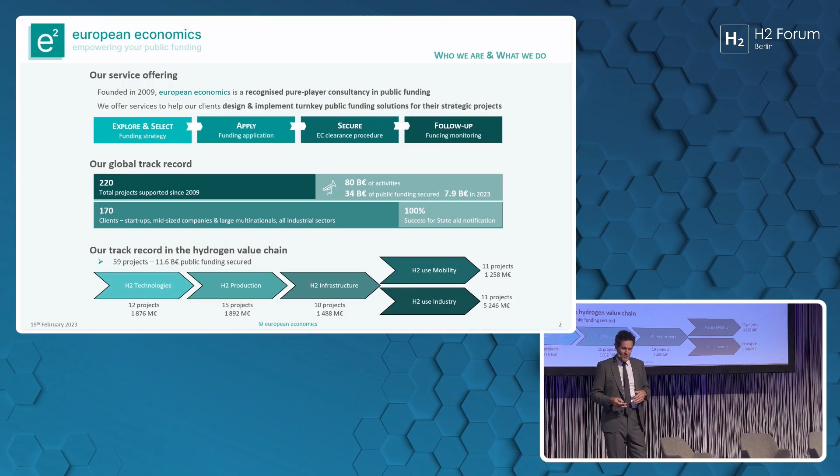As you most probably know, there were 4 IPCEIs on hydrogen that were started. 3 have been validated by the European Commission, 1 is still under assessment. The hope there, starting in 2019 - I remember the first meeting in Brussels in October 2019 - was that the IPCEIs could kickstart the European industry for hydrogen. There were more than 120 projects started in these IPCEIs, and they secured close to 30 billion euros in grants, which presumably could have solved the chicken and egg problem in the European hydrogen industry.

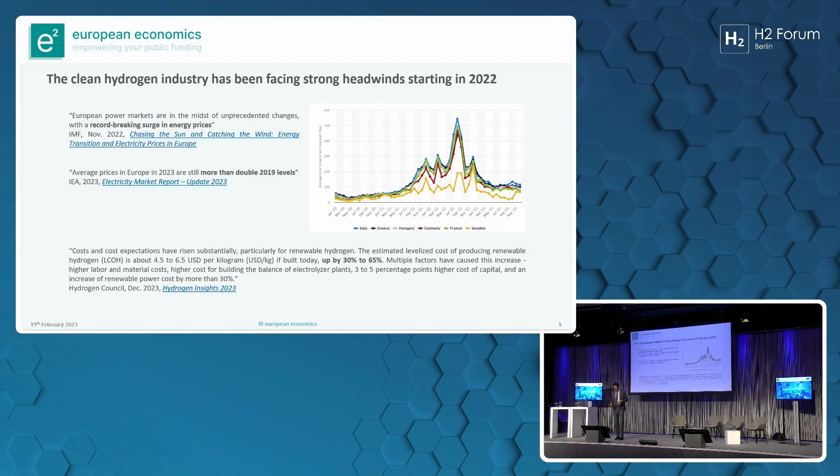So basically the situation that you are facing now as the hydrogen industry is that the IPCEIs, Hy2X, meaning Hy2Tech, Hy2Use, Hy2Infra, Hy2Mobility, will not be able to kickstart the European clean hydrogen market.

Specifically, when we look at the projects on the demand side, well, they were profitable with 100 million euro public funding, with a price of green hydrogen maybe around 4.5 euro per kilo at that time. But now this price cannot be met anymore. So the projects on the demand side are not profitable anymore with the funding that's secured in the IPCEI, and then you have the domino effect again.

No demand means no supply, means no technologies for electrolyzers. This is maybe over-pessimistic, but we basically go back to the initial situation in 2019 with the chicken and egg problem, supply waiting for the demand and vice versa.

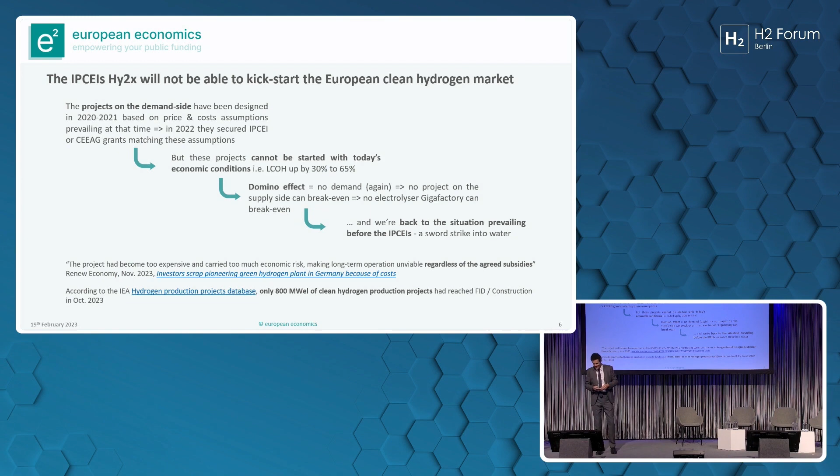So basically, the situation that we are facing now is the same that you faced some years ago. The expansion of the European clean hydrogen industry cannot be unlocked without additional public and free money. Debt doesn't make sense, equity doesn't make sense because the projects are not bankable, okay?

So the only solution is to go back to the member states, the European Commission, to ask for more free money to be able to increase the profitability of these projects. And you have several quotes here on the screen that substantiate my statement here, from projects that say, okay, we hope we could do it, but now we can't do it anymore, given the new economic environment. So the solution is not on us, the solution is on the governments and the European Commission.

So what's the conclusion? We must find a way out, we must act quickly. I think everybody understands that the timeline, there was a kind of hype at that time with the IPCEIs. The promises were very important, very strong, and we realized that it would be a bit more difficult than what we expected at that time. So member states and the European Commission must find a way to secure more free money for clean hydrogen projects.

If we give a look at the European targets for 2030, you know the numbers very well probably. The EU calls for 100 gigawatt of green hydrogen capacity by 2030. From my understanding from the project that we supported, this requires more or less 100 billion euro of public funding for this capacity. For 7 years, that's more or less 14 billion euros per year. We are very far from the target.

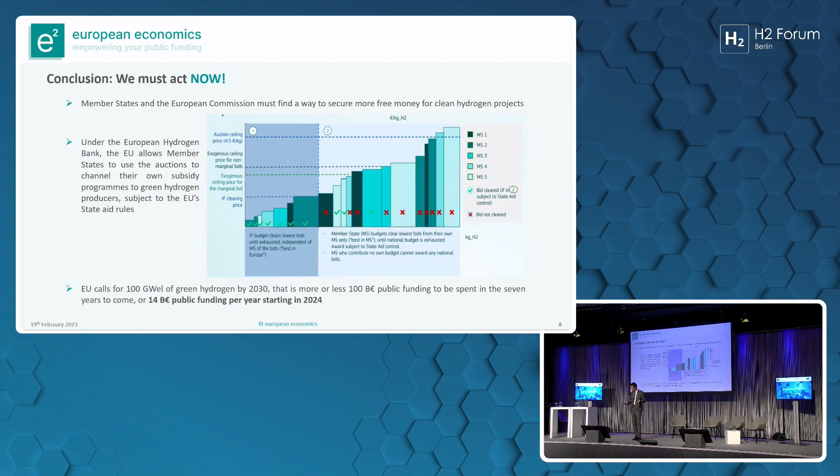It's the big question: why are you there in the world, basically? Maybe you can elaborate on that a bit. Why is there a need, provocatively said, for another costly advisor, when, for example, Hydrogen Europe has a great offering on R&D funding and other supports? So what is the sweet spot, basically, that you are filling with your company?

What was very important in the IPCEI, just to reflect upon support for R&D, the new thing in the IPCEI is that not only R&D could be supported, but also the so-called first industrial deployment of innovative solutions. For example, we supported several projects that would invest into the development of innovative electrolyzers.

The support from the governments under IPCEI rules would not stop at the pilot scale. Companies, conditioned of course on the success of the pilot, could invest into the manufacturing, the gigawatt manufacturing plant, and be supported for the ramp up of the gigafactory.

So this is where there is a big difference between IPCEIs and state aid for R&D. It goes to the first industrialization and the first commercialization of innovative products, and we supported a bunch of projects going through this scaling up phase, so to say.

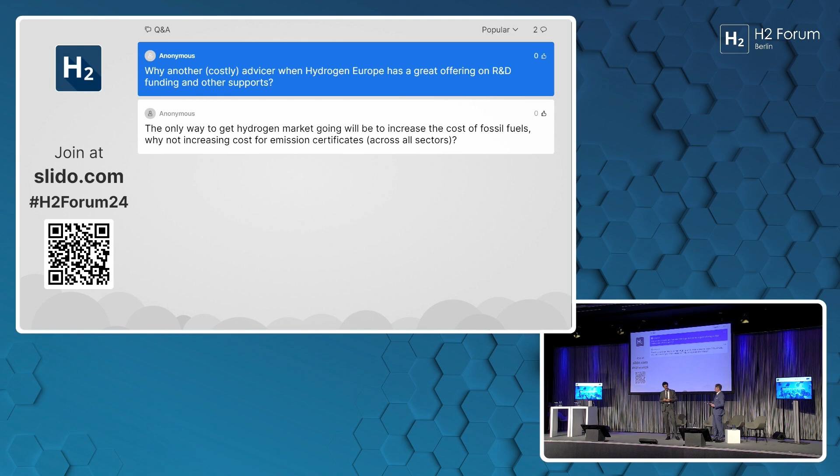Okay, good, thank you. Now, here comes a thesis. It would say that the only way to get the hydrogen market going will be to increase the cost of fossil fuels. So why not increase the cost for emission certificates across all sectors, and then just have the market solution, basically, for the hydrogen market?

Well, my humble opinion as an economist is that if the solution was that simple, we'd have implemented it already. So it goes in different directions. Of course, putting higher taxes on fossil fuels could be part of the solution, but you're just talking about fuels for cars, for example, and you probably know that taxes already represent 80% of the price you pay, more or less. So we already went very far in that direction.

Public funding for hydrogen use was also part of the solution. Just to give one example, we supported a number of hydrogen solutions implementation in the steelmaking sector to move away from coal to the reduction of iron ore through hydrogen. This has huge cost, but I hope that at the end of the day, in a decade from now, most of the steel made in Europe will be decarbonized through public funding.

Another way, of course, to make the hydrogen market more competitive is to scale up. You know what economies of scale are, for sure. So far, the green hydrogen market is very small, so we have no economies of scale. When the market expands, of course, the cost will go down, and if the price of a carbonized solution goes up at the same time, at some point it will become competitive, and public funding will not be needed anymore, for sure. So it's a combination of many mechanisms to be able to trigger clean hydrogen projects.

Maybe one last question. What is your, let's say, forecast now for the next years with regard to public funding? How will the whole scenery develop? Give us some insights.

Ladies and gentlemen, welcome to my talk on water purification technologies. The electrolysis projects starting throughout the world are in industrialized areas where we have tap water. They are also in desert areas and offshore regions because renewable energies are abundant there, and there you find saline water. All these regions have in common that the ultra-pure water needed for an electrolyzer to process is just not there.

So every electrolyzer that we set up will have as an accompanying partner a water purification device. This device has to make sure that the water the electrolyzer processes is ultra pure, in order not to jeopardize its lifetime and to keep a reasonable levelized cost of hydrogen. The purity is measured in electrical conductivity - ultra pure means very low electrical conductivity. Depending on the electrolyzer technology you choose, it's 0.1 microsiemens per centimeter, and the water you use, for example saline water, has conductivities up to 50,000 microsiemens per centimeter. That means a lot to do for this water purifier.

The amounts of water used - you see on the slide - for a kilogram of hydrogen, we need 9 kilograms of water. Just to give you an idea, in this bottle is some water. We could turn this, after purification, into green hydrogen, and that would store about a kilowatt hour of energy. Now, we're not talking kilowatt hours here, we're not talking gigawatt, we're talking terawatt hours, so we need vast amounts of energy.

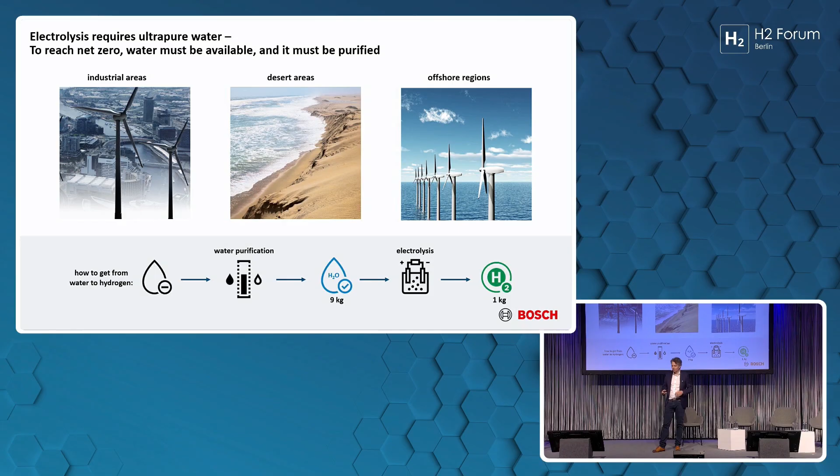It sums up for the net zero scenario to about 4 cubic kilometers of water per year. That sounds like a lot, and it is a lot. But if you look at the different industries using water - chemical industry, agriculture - the water needed globally for green hydrogen production is just 1.8% of the water consumption of humanity today. So it's small. Nevertheless, in those areas where we make the electrolysis, we still need the water. So if you go to a desert area with no water at all, you have to make sure it's there. Water availability is a very important topic, and while there are existing technologies for water purification, this is a new use case.

This use case that we look at for water purification couples with the electrolyzer, sometimes in remote locations. It has very tough physical boundary conditions the technology has to cope with. One thing is intermittency - start-stop and unexpected behavior of the energy. This is something the technology needs to handle. The second thing is serviceability. In remote locations we need a technology that is very robust and needs low maintenance. Question is, can the water purifier guarantee that?

And the third thing is sustainability. The green hydrogen approach must also assure that the water purification does no harm to nature, and we don't take away water from other uses. So those three points are important for a water purification device, and at Bosch we made up our minds what can be a good technology.

We are entering the market with a solution I'm showing here on the screen. This solution is containerized, and it combines a mechanical vapor compression distillation with an electrodeionization unit. You can imagine this is a container - you input water, this can be seawater, and you get out ultra-pure water to process for the electrolyzer, be it PEM, alkaline, or other electrolysis technologies.

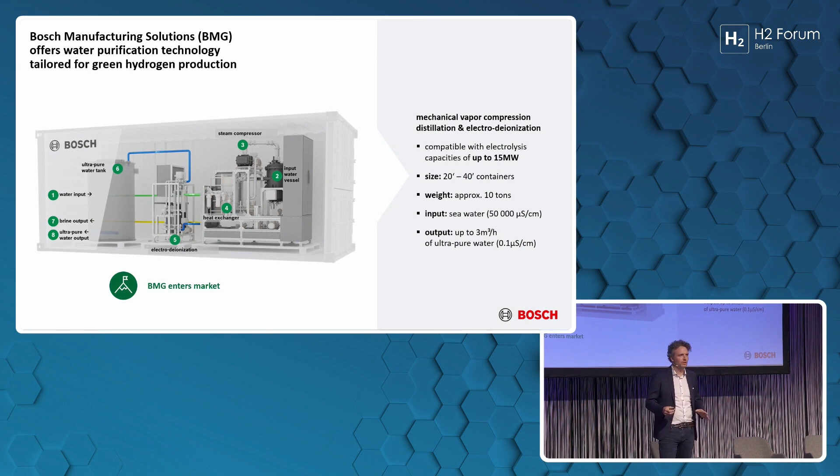We have sized this water purifier to supply the process water for electrolysis up to 15 megawatts of capacity. And it weighs about 10 tons. It takes in seawater of 50,000 microsiemens per centimeter, and the output is ultra-pure.

One thing you may wonder if you hear distillation is evaporation and condensation - that takes a lot of energy. However, we have implemented in our device recuperation of this latent heat needed for evaporation, and this results in the fact that we need a very small fraction of the energy of the entire system coupled with the electrolyzer.

To produce a kilogram of hydrogen, an electrolyzer needs around 50-60 kilowatt hours. The water purification coupled to that electrolyzer needs only up to 0.2 kilowatt hours. This means we have a really marginal amount of energy needed here for the water purification. Rather than trying to save any energy there, we advise to focus for water purification on its robustness, so that you make sure you have no downtime ever of your electrolysis system due to any failure in the water purification.

We want to point out some features of water purification technology for hydrogen production that we consider the most important. The one has to do with the intermittency of renewable energies - it must be dynamic. So for any changes in the load, the device must be able to follow within seconds or up to a minute. The second thing is it must be robust. Some of our customers are asking to apply the device in desert areas with strong winds or outside in the offshore area.

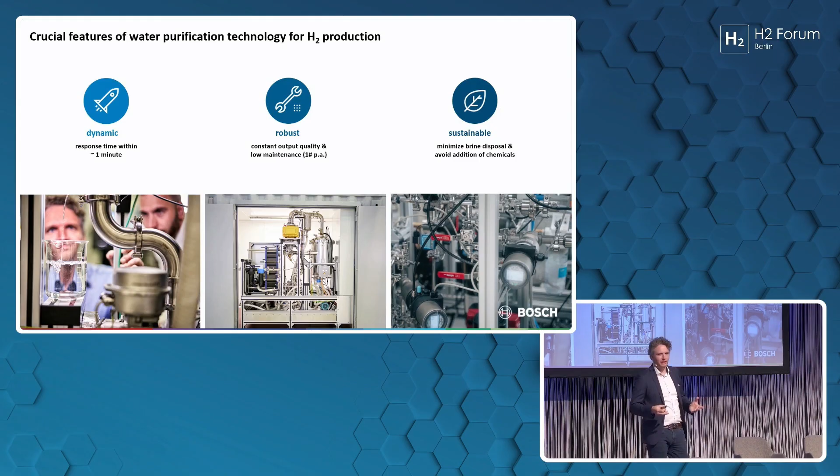If you look at this one example - and this is a very innovative, exciting example - decentralized offshore hydrogen production, it becomes immediately clear that here, where you turn seawater outside on the ocean into ultra-pure water to be processed by an electrolyzer right there at the wind turbine, you do not want to add any chemical to the process. A state-of-the-art, membrane-based water purification device does need lots of chemicals. We want to make sure, by adding no chemicals, this is a sustainable approach.

With green hydrogen, we're all here because we want to be able in some decades to turn to our grandchildren and say, back in the 20s, we turned this climate change thing around and we introduced green hydrogen. But we don't want our grandchildren to come back and ask us, why didn't you care about the quality of the water? So no chemicals to be processed here, maximally robust and low maintenance, in order to have a maximum uptime with this green hydrogen production scenario.

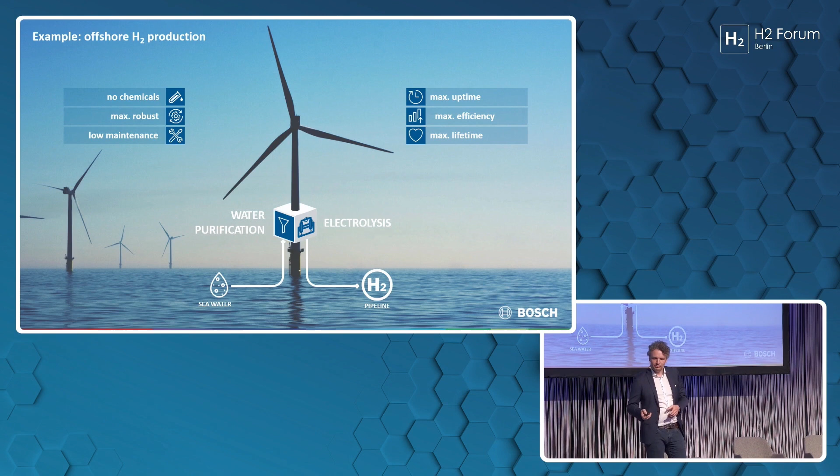So let me point out what we do at Bosch Manufacturing Solutions. What I just presented is a water purification device that we are entering the market with.

We also have at Bosch Manufacturing Solutions the integration of electrolysis systems for specialized applications, including H2 testing. We also have production equipment and testing solutions for hydrogen injection components, for fuel cells, for the mobility sector, and also for the stationary energy sector.

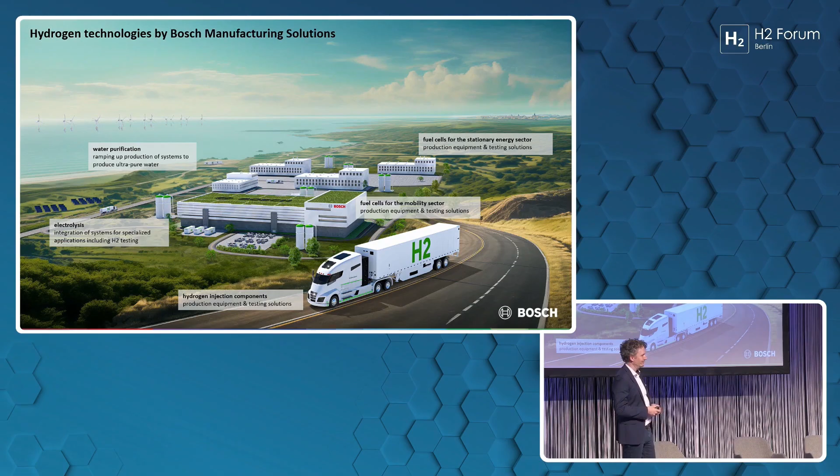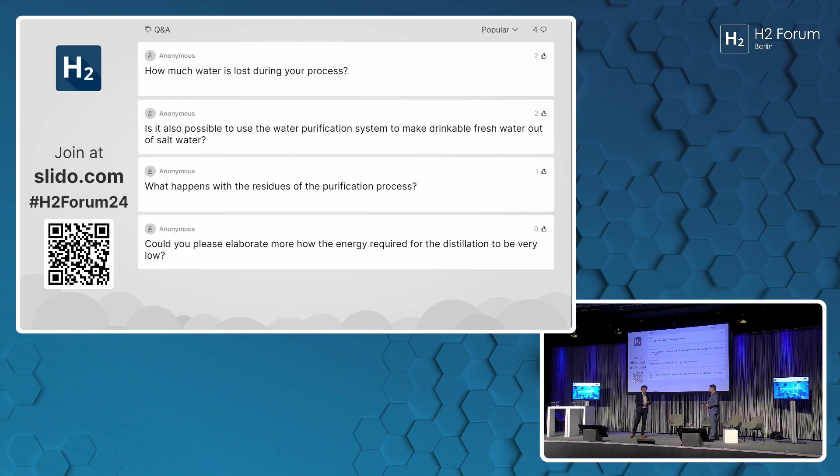Thank you, Wolfgang. One of the questions is what happens to the residues of the purification process, for example the brine? So, of course, when you have input water - in that example it's seawater that I just showed - you get the ultra-pure water, but then you have a concentrate of the salts that you have to dispose of. What's important is to comply with regulations, which may forbid adding any process chemicals into the environment. So it's always an advantage to say that in the process there are no added chemicals. What really happens in practice is you dilute this concentrate again and then dispose of it into the environment - in this example into the sea, and in other examples into the sewage system.

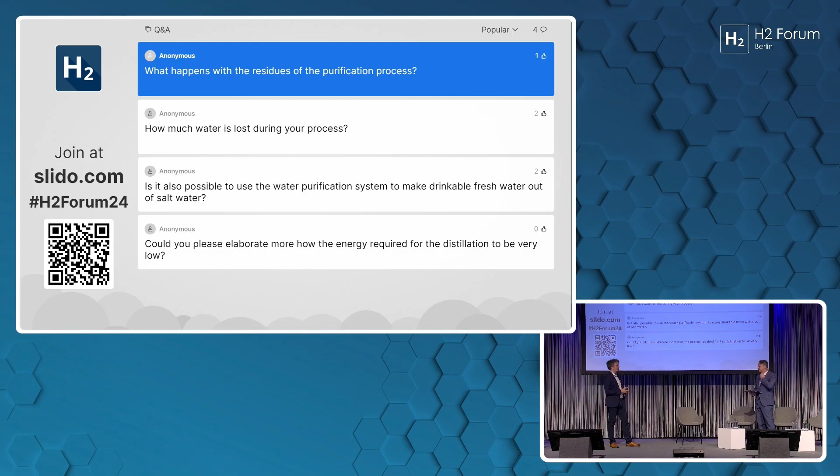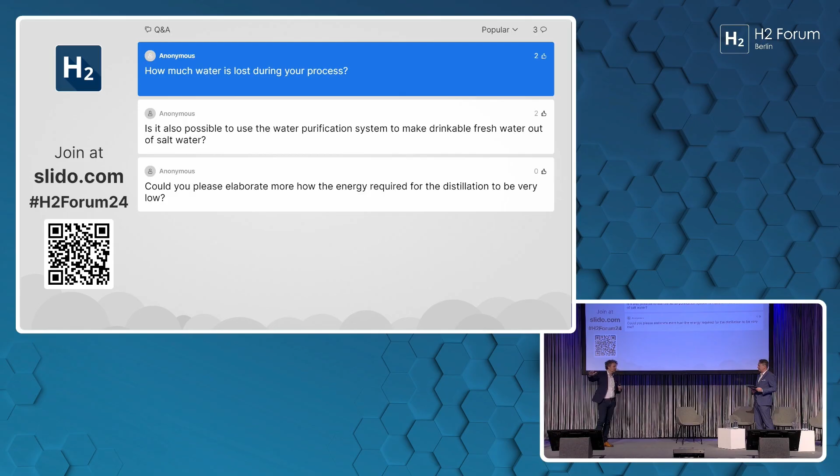How much water is lost during your process? That very much depends, you must say. In this setup that we have now, we have a 50% water efficiency, but that's really by choice. We can concentrate the water quite high, and if needed, we can actually concentrate up to nearly 100%. There are technologies we could add to this - the so-called zero liquid discharge, which is an innovative technology we could add technically. But right now, at the moment, we have 50-50. So you give me 2 liters, 1 liter is for the electrolyzer, and 1 is disposed of.

Is it also possible to use the water purification system to make drinkable fresh water out of salt water? Generally, yes. The distillate water that we produce can be remineralized and then be consumed as drinking water, and there are ways to do this. I would consider this really as a chance, a dual use case - to produce water for green hydrogen production, but also for the people that work right there. We're looking at producing hydrogen in areas which are water scarce, and this is a possible dual use case.

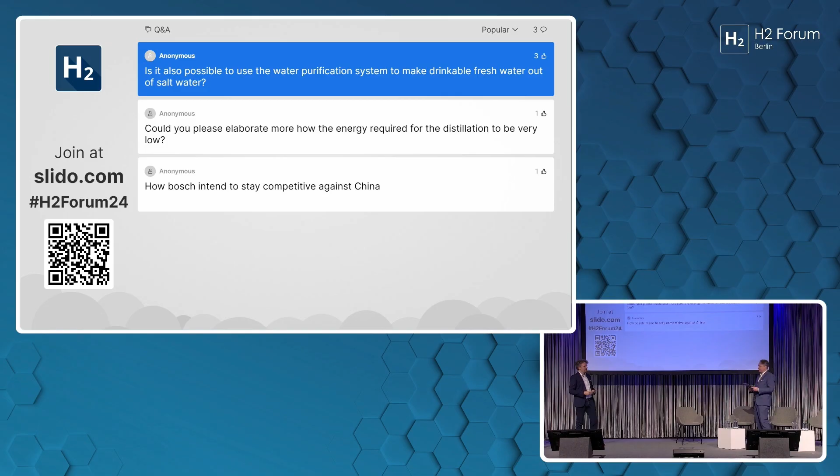Could you elaborate again on how the energy required for the distillation is very low? You said normally you would need a lot of energy - could you make your point again why it is low in your case? The distillation of water is usually energy intensive. What we do is evaporate water, which needs lots of energy. We then have a steam compressor that raises the pressure to a higher level. This also means the condensation that happens is at an elevated temperature - condensation happens at a hotter temperature than the evaporation. Then you can use heat exchange principles to win back that energy - that's the recuperation I mentioned. This ends up being an energy efficient water purification method. It's more energy consuming than a cold membrane-based technology, but we are still in a range where the energy consumption for water purification is tiny compared to the electrolyzer.

The time is running out. There is one question - this is a mega question. Would you like to make a short, specific comment on that, and then ask the person who asked it to join you tonight for a longer discussion? Is there any particular point you'd like to highlight on how your applications intend to stay competitive versus other competitors, for example Chinese competitors here?

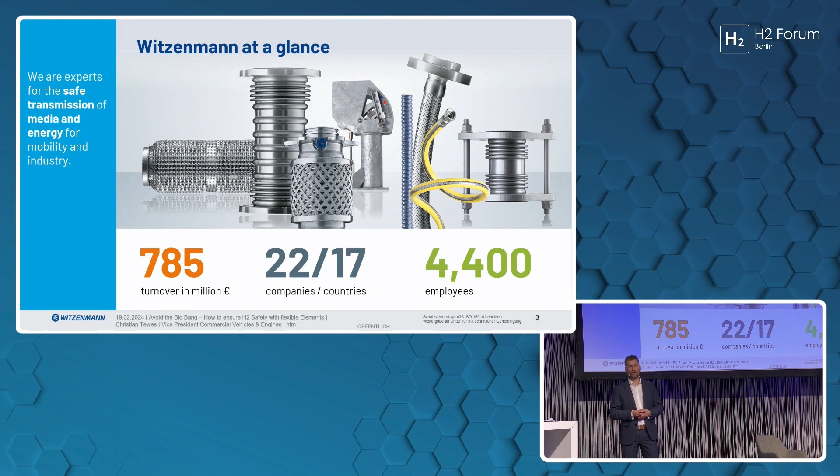We are also supporting the industry now in the transformation towards alternative concepts in fuel and energy. It's about transmission of gases and liquid media. As we are active in 4 different branches, we can gain our experiences from all these different branches into our business. Actually, they all require totally different elements.

For example, mobility, which contains passenger and commercial vehicles, requires scale-up ability. We need to scale up our production, talking about numbers of parts we produce of 800,000 to 1 million per year. On the other side, the aerospace industry requires very high demand in terms of technical cleanliness. This shows that throughout this whole time frame of experience, these different requirements are always on our table, and safety is always a part of it.

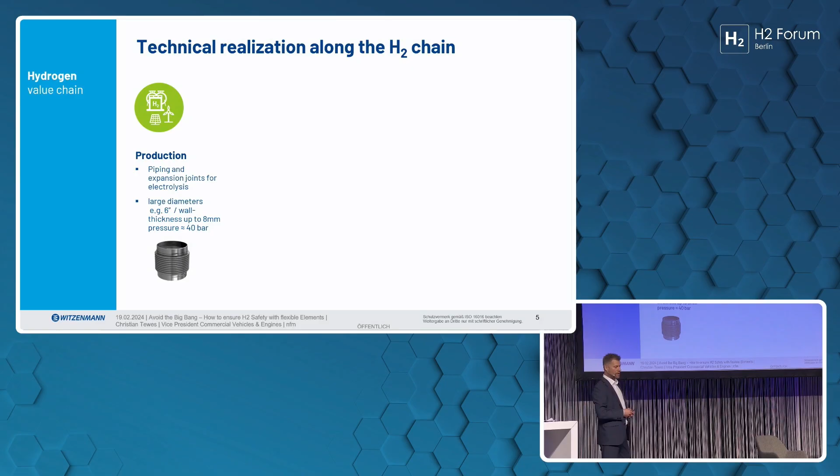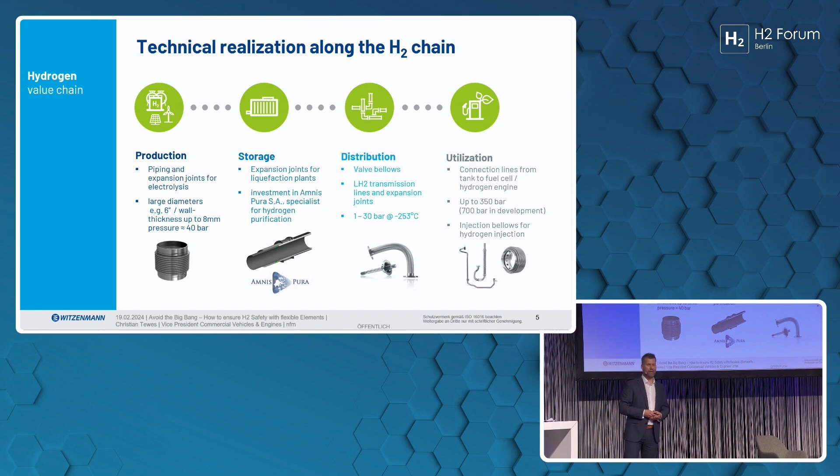Just to give you an example where products from us are installed: you see us in the electrolysis area with pipes and expansion joints, realizing this also in the storage of hydrogen. We have expansion joints in liquefaction plants. In the distribution, we also see valve bellows that we produce and LH2 transmission lines. Finally, also in the utilization, whether it may be fuel cell or hydrogen engine, you also have our connection pipes and any kind of flexible elements established there. So we are actually already active in several fields of products.

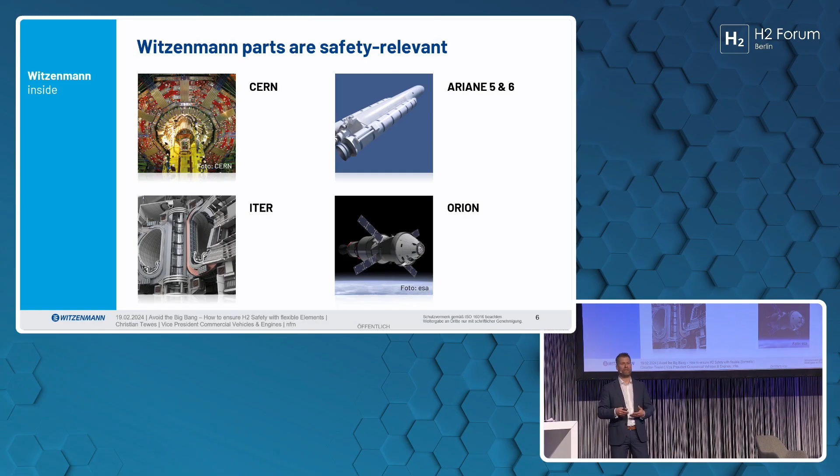However, in the H2 world, the safety requirements from customers are very high. Very often, due to missing guidance, regulations, and norms, the customer requirements are even higher than they should be - over-engineered, just to be on the safe side, covering a risk they don't really know. However, coming from different other areas in the aerospace business, we are used to taking the customer where he is with his questions in the engineering, in the development phase. So we elaborate on his demand to make sure we don't over-engineer the safety requirements.

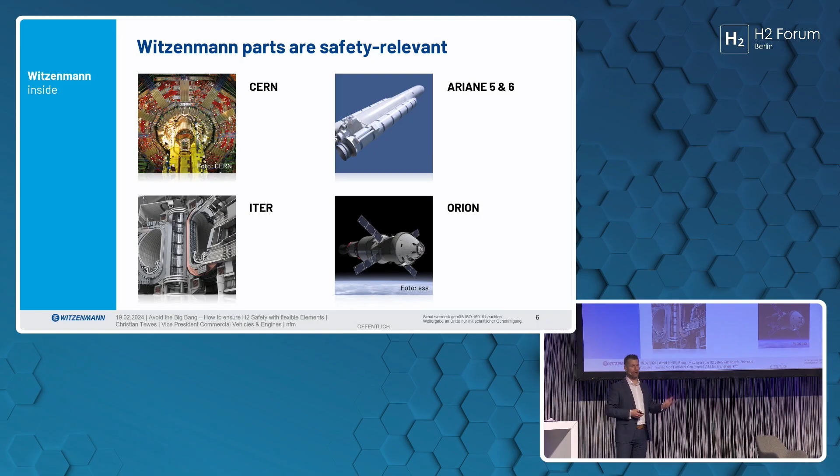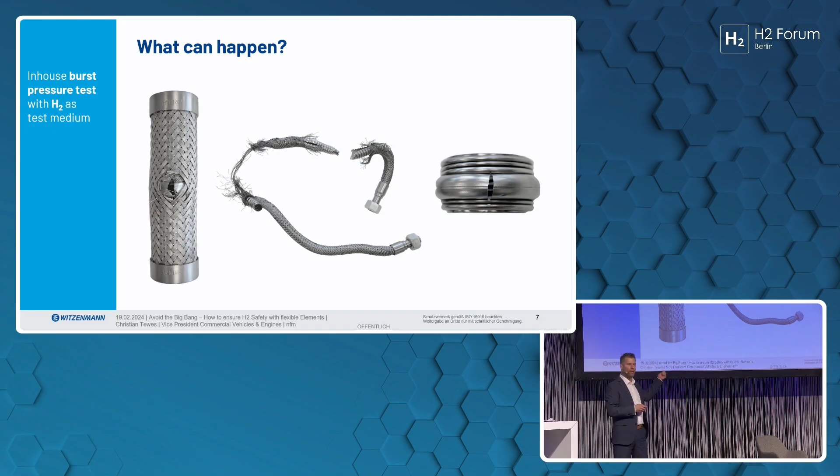For example, we have experience from the CERN Institute, the Ariane rockets, the Orion rockets, or ITER. Everybody knows what can happen. This is also what we try in our labs and test benches - we blow up our own products to see what can be compensated in this part, how we can deal with that. In terms of safety, we try to avoid this - we try to avoid that the Big Bang may happen out of this.

Now, how do we do that? Firstly, of course, we follow the general regulations of quality standards which are there in the industry.

We are also preparing ourselves to develop more, to be ready for the next step of development, because quality aspects and norms will come with the regulations.

As well, we have a very high level of expertise in welding for flexible and non-flexible pipes. We control it with a centralized concept to measure the welding seam with X-ray. We also go into the field of developing monitoring systems on our flexible products, with sensoric.

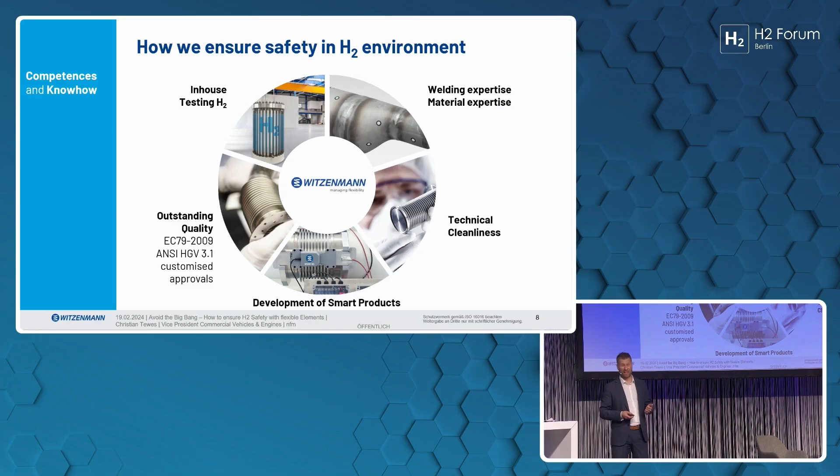At the end, of course, we have a target to make leakage detection. Two elements are very important for us, and we see them as a very clear element for security and safety: testing, because this is experience, and technical cleanliness.

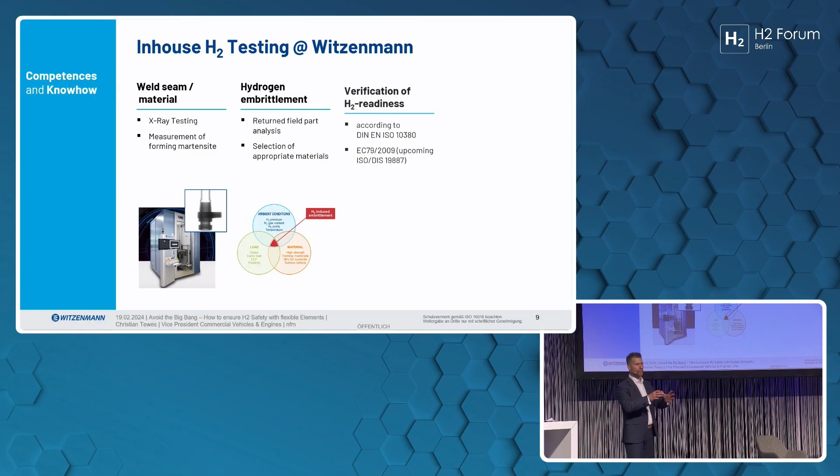Testing, you see several examples of testing that we have to do. X-ray testing is one key element for making sure that we have the right product in the market.

The hydrogen embrittlement, we overcome with the choice of the right material. We establish and proceed that H2 readiness is actually living in each and every step of the engineering. And of course, it's again testing, testing, testing: low frequency testing, vibration and pressure cycle testing. So we test whatever we can to see how far we can go.

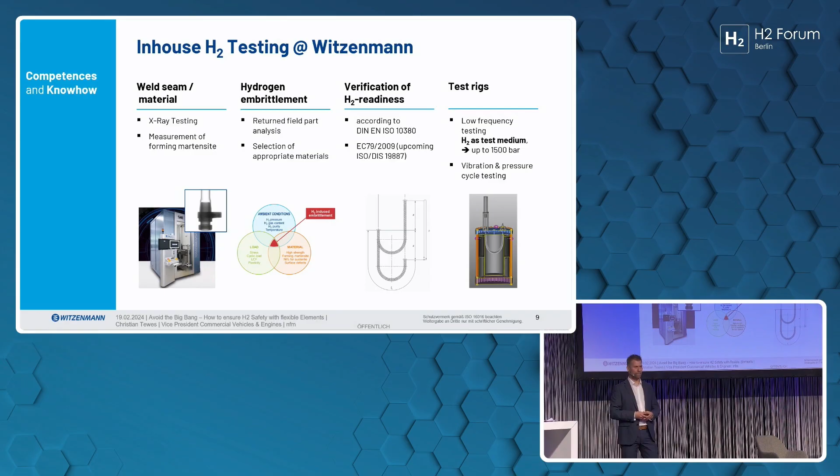Also, in the field of technical cleanliness, the H2 world requires a lot. Here we decided that technical cleanliness is a core element in our living character, having a central department interacting with all the other departments, making it a clear element in the production and logistic lines. That means for the production area, we also use requirements from aerospace, like pressure chambers or clean rooms.

And then in the production line, we use several elements and materials to clean substances and clean the products, making sure we monitor the whole process, so we can really ensure technical cleanliness throughout the whole engineering and production process.

It is very cost intensive. It requires a lot of monitoring, but at the end it pays off because it's a matter of safety.

As a company, of course, we do what we do here: networking. We also exchange with institutions and associations. We want to be part of the development. We want to be part of the club. We enjoy giving our experiences into the market.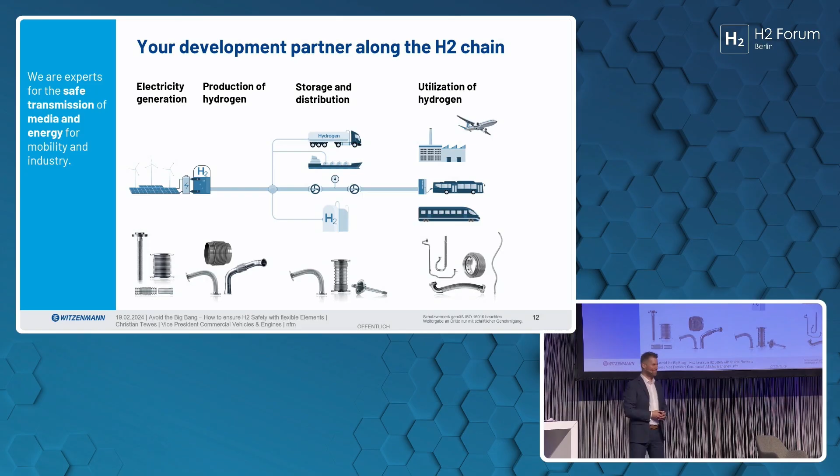We still see the H2 chain from electricity generation over to the end customer. Where would you say do you focus, or will you focus as a company, and where do you see the biggest dynamics going on at the moment? Where are you involved? Can you give us some insight about your view of the hydrogen industry and value chain?

As you could see, we are involved actually on each and every step of the chain, depending on the scope. I'm representing the commercial vehicle part of our branch, and in the commercial vehicle area, the use of hydrogen will be coming in the future, but it's not the right time right now. Of course, we're talking about development, so we have to be part of it right now. I see a big aspect of focus for our interest in business in the electrolyzers. I think this is also an element where we can all learn a lot, because everybody is pioneering somewhere here and there, and this is one focus area that we are going for.

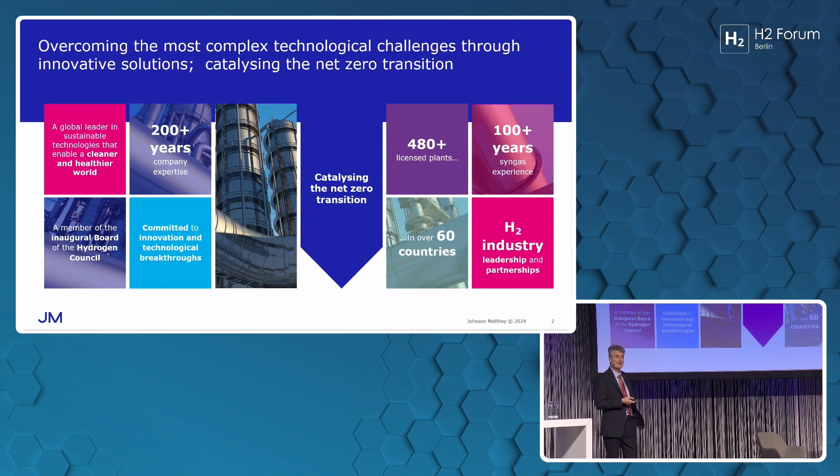We're still market leaders or heavy participants in the hydrogen economy, so our catalysts make one of the largest contributions to the hydrogen that's produced today. We're also heavily involved in PEM technology, providing components for PEM fuel cells and PEM electrolyzers. More towards the topic I'm talking about today, we're a catalyst and process technology company that makes a variety of processes we license in the low-carbon economy, such as making sustainable aviation fuel, e-methanol, or e-ammonia. Making ammonia cleanly and cracking it cleanly are part of that group.

So why is ammonia cracking important here? Well, if we look at the world energy system we have today, we move an awful lot of energy around the world. Looking at how the LNG markets have evolved with the issues we have in Europe at the moment, you can see the amount of energy that needs to move around the world in a carbon economy. The same is going to have to happen in a net zero economy.

Unfortunately, the sun currently shines and the wind currently blows, sometimes in far-off places from where markets currently are. It's difficult to move electrons. Hydrogen is a wonderful thing as a chemical feedstock and as a high-density source of energy, so that'll be good. But moving it at close to absolute zero is a new technology.

One solution is to convert that hydrogen into ammonia, which you can move about at much lower pressures and different temperatures. That has the advantage that it's a known technology. There's over 20 million tons of ammonia moved by ship around the world today. So there are known technologies, known shipping companies, people know how to handle it, and there are known qualities of ammonia that people understand.

So what are the use cases? Imagine hydrogen produced in Australia turned into ammonia, moved around the world to Europe on a barge, arriving at shore. It could be cracked in decentralized locations into hydrogen and nitrogen that go straight into a gas turbine. There are other delocalized applications like producing hydrogen for fuel cell applications, but a really major use case will be centralized cracking near ports, near shore, to put high quality hydrogen directly into grids. That's the use case I really want to talk about today.

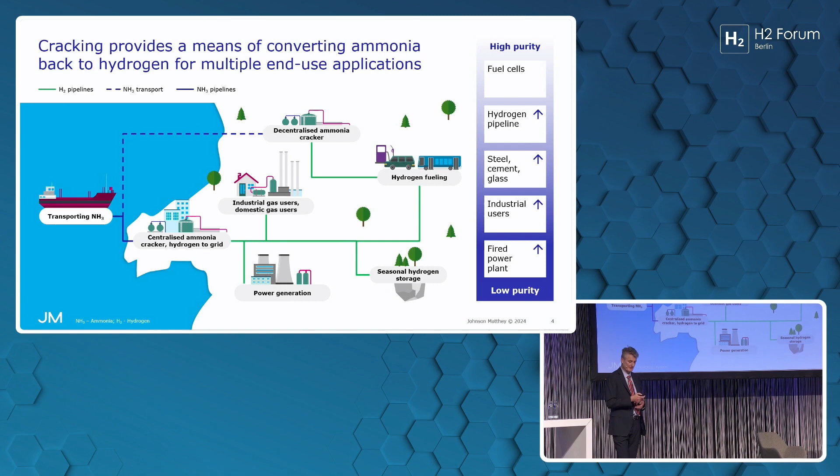One thing I should say about Johnson Matthey's process technology business is that, quite unusually, we're both a process technology business that's heavy on engineering and modeling, and we're also a chemical company that makes catalysts. That catalyst technology put together with an understanding of process technology, where we design and license processes, enables us to work on both together and iterate systems so we get the best catalyst for the best engineering solution. This is very useful for producing systems optimum in efficiency and also optimum in CapEx. Low CapEx, high efficiency, low OpEx is going to be really essential in this world, particularly in power generation where, for example, margins can be wafer thin.

It was interesting listening to the companies talking about startup technologies earlier in the day. We were looking back at our heritage in ammonia cracking, and the first patents we could find were back in 1931. Ironically, the use case there was to produce nitrogen - we threw away the hydrogen. People wanted the nitrogen at the time and couldn't think of a use for hydrogen.

In the 1950s and 60s, we developed the world's first nickel catalyst that replaced iron catalysts being used at the time, ironically for heavy water applications. That nickel is really robust for high temperature and longevity. We have historical experience of actually making small ammonia crackers, and some of those are still for sale today from people who bought the technology off us. We've also operated ammonia crackers in plant startups for other technologies, where it's been useful to have hydrogen for reduction or nitrogen to ensure a blanket of inert atmosphere when starting up other types of plants. We also have technology for purifying hydrogen - a membrane technology with palladium, which can be quite important as well.

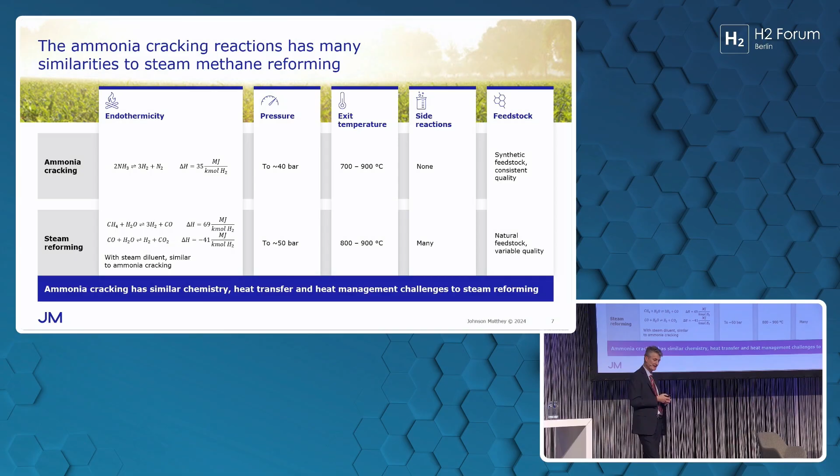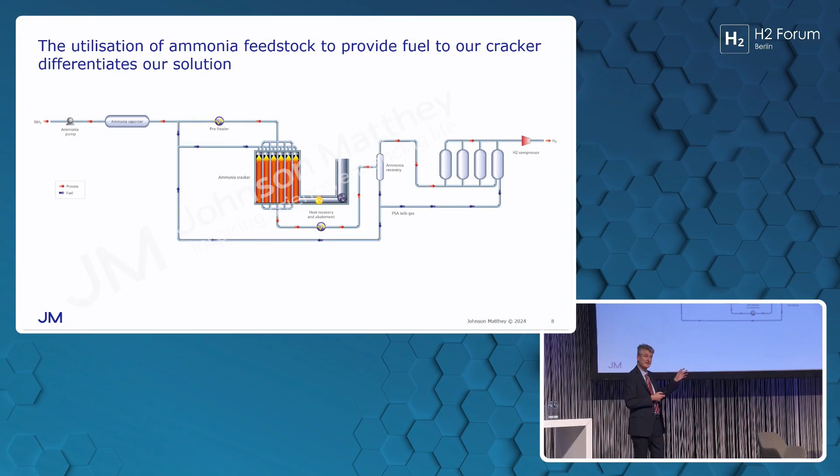What we've chosen to do in the center is fire this cracker with ammonia and also with some waste gases from the process streams. Other systems will fire that with natural gas. So our method is a truly net zero solution, because the fuel for firing the cracking is also a net zero product. We've done a lot of work on the quality of the feedstock, and that means we're ready to go directly to a commercial system.

What's enabled us to go directly to a commercial system is our experience in heat transfer. The world's largest hydrogen production facility at the moment, which is 800 tubes, 500 megawatts of capacity, in Trinidad, is a Johnson Matthey design. We've also got great modeling, which enables us to go from that expertise, from a theory and a model, directly to a world-scale product without lots of pilot stages in between.

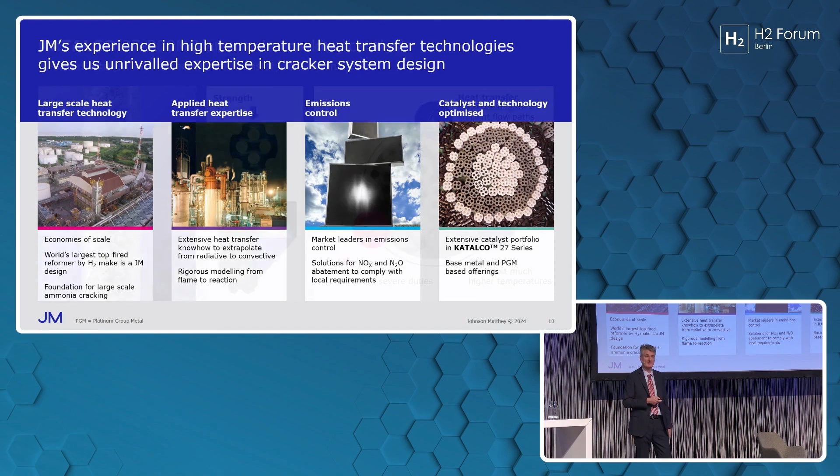We're world leaders in the emission controls coming out of these processes, and we've got a range of catalysts now for tailored applications. This is what a tube looks like. We've put our KATALCO 27 nickel catalyst on this quadrilobe pellet, and we have world-scale manufacturing facilities for this catalyst. The way the pellet stacks in the tube enables great heat flow and gas flow through the reaction tube, which is very important.

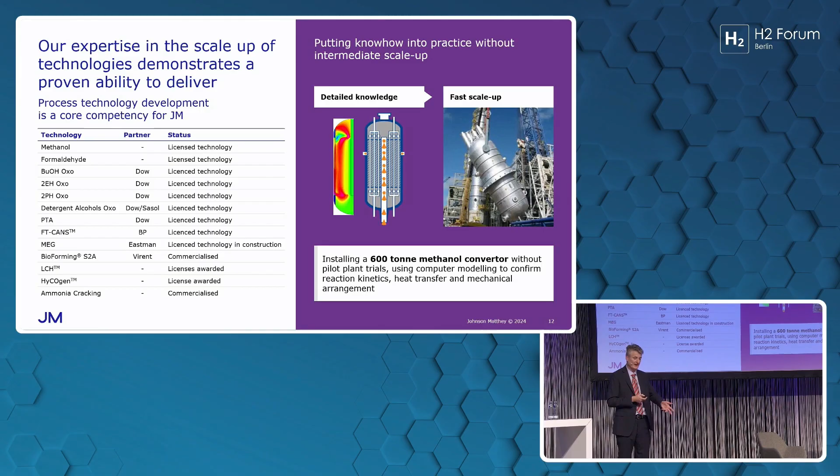I've got here a list of processes that we've developed over the years in conjunction with major chemical industry partners. What they do is invent a technology in the lab, and they come to us to help commercialize it and scale it up because of our expertise in taking small laboratory-scale processes to world scale. These are some of the examples, and you can also see we've got partners who've come back time after time because of our success in commercializing these technologies. On the right, this is a 600-ton reaction vessel for methanol conversion, and that's a 200,000 times scale-up - it went directly from a model on a computer all the way to a reaction vessel without any intermediate pilot stages.

So, to finish, ammonia cracking is, we think, going to be an essential part of the ecosystem in which we have a net zero energy system in the world in the future.

Ammonia will be important. Being able to crack it will be important. What we hope to bring to the party is a technology that is robust, ready to commercialize right now at today's levels of efficiency. So it doesn't have to go down a curve of improvement. It's available at full efficiency today, based on our long expertise, and we've already got the catalyst expertise to make that happen.

In terms of progress, we've got a pipeline of customers and projects at the moment looking to start up their plants in 2027, and we continue to partner with customers. For example, we have an example of us working with Doosan on a process to crack ammonia and go directly into their combined cycle power plants.

So I think I'll finish there. Thank you for listening at this late hour of the day. It's been great to see the energy around this today. I'm looking forward to some of the sessions tomorrow looking at the resilience of hydrogen supply chains and how to import green hydrogen. Thank you.

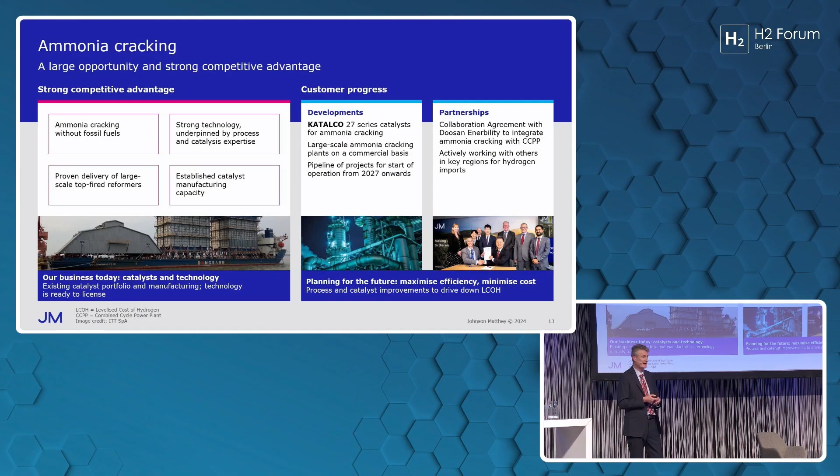Thank you, Eugene. And again, we see here some examples of partnerships. You do indeed, and maybe customers. What kind of customer segments do you foresee to be very important for the ammonia?

So I think it's interesting because we're very familiar with customers who make ammonia, as we are a major supplier of technology into ammonia manufacturers. New people will crack ammonia into hydrogen, so power generators potentially, people who run grids, people who run power plants will all be - and there's a space as well, I think, for new players in this space. But I think the large integrated oil companies are potential future operators of this technology.

Okay, good, thank you. Now we've got questions here on the list. What is the status of your reverse water gas shift technology? Which technological readiness level do you consider?

Well, it's already fully commercialized, and the first commercial plant is being constructed at the moment in the Basque Country in Spain with Repsol and Aramco. So that's one that's ready to go, and once again there's quite a few people interested in that technology. So that's just what you need: clean hydrogen and clean carbon dioxide, and you've got any hydrocarbon you want.

Okay, very good. How is the proportion of JM working on the catalyst development nowadays? So JM has a number of businesses.

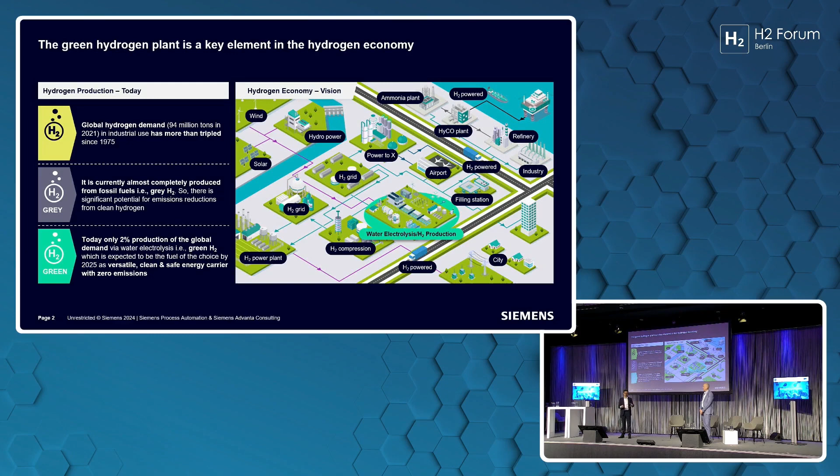That is also a system that has a complexity that really needs to be managed. Some of the questions we encounter from our customers and partners, thinking about the green hydrogen plant, are: how do you make such a first-of-a-kind facility work when there's no blueprint to easily copy across? How do you manage the intermittency of renewable energies? How do you maximize revenue from different offtakes in your project? And how do you balance the trade-off between managing the risk of jumping into premature technologies versus the benefits of being a first mover in the market?

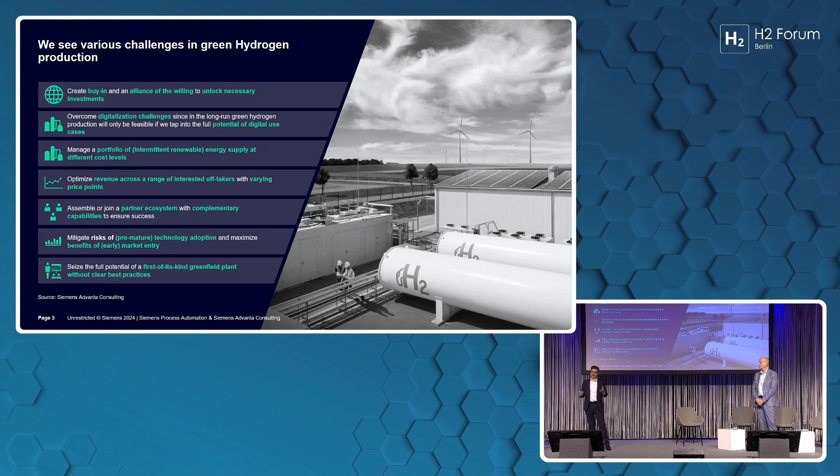We accompany you through along your journey, and you can get this enabled through digital technologies. I'm going to hand it over to Peter in a moment, who is going to run us through that typical journey along which we're enabling you in realizing some of these projects. Thank you.

Thank you for your attendance here. What I would like to emphasize with this slide is that we're actually the enablers of plants. We're not the EPC, we are not the manufacturer of an electrolyzer, as Siemens AG. Most of you are probably aware that Siemens and Siemens Energy have been split entities for approximately 3 or 4 years now. What we do in our daily business, and we've been doing this for quite a long time now - the first power-to-X plant I dealt with was 13 years ago.

We supply equipment to plan, optimize, and operate a power-to-X plant or a hydrogen plant. In this process, we're dealing with multiple stakeholders involved in the project. It's not that we have one customer - we're actually talking to multiple customers, because all of them need to somehow optimize and digitalize their equipment, and everything has to come together. We start off in a very early stage in these projects talking to the investors, and we're often even involved in the investment phase. Then you go through different phases of the project.

You have a conceptual design phase, and in this design phase you might need software to build up a digital twin of the plant, which we strongly recommend because it helps reduce faults and ramp up the project by a magnitude - basically getting it running a lot faster and more safely and securely. You'll then have a process engineering phase, and so on, and a construction phase, and at the very end, you'll have the operation.

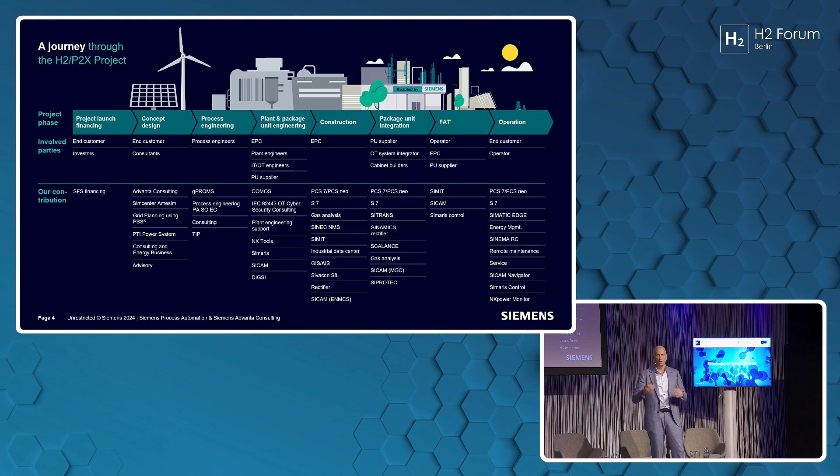So I've got a bit of a different view coming up on this, to show what we do. We have remote and autonomous process control - that's typically where we come from. We have process control systems and automation systems, S7 or PCS7 based, depending on the size of the units. That's what we're typically known for, which also allows you to have remote operation. It's all about environmental health and safety within these plants, because we have to ensure the plants are operated in a safe way.

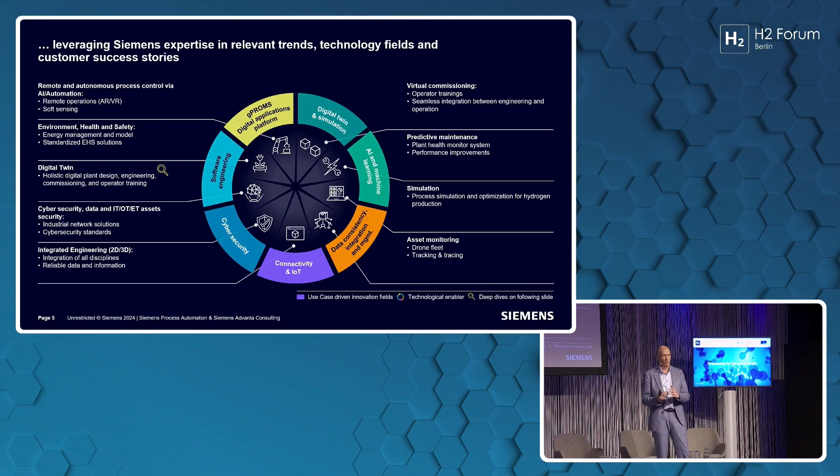We deliver digital twins. As I said, a digital twin is more than just simulating the plant - it's also integrating that simulation into the running plant so that you get a learning loop, that you learn from the operation, that your model learns from the real data of the plant, so that you can optimize the plant while running it.

And go through different scenarios. It's about cybersecurity - we have an entire portfolio of hardware and software regarding switches, routers, firewalls, industrial grade, to ensure that you won't be hacked. It's about virtual commissioning.

That would be a topic, for example, that you have a training software for your operation personnel, a simulation set up for your operating personnel, that you can enable them to run this plant without working on the actual running plant. It's about predictive maintenance, meaning that you see when your equipment needs to go into some sort of service - for example the electrolyzer, that you know when to take a stack out of operation, do the work on it, and then put it back into operation.

I won't stress the simulation, I've done that already, and it's about asset monitoring, meaning that you know what kind of assets are in your plant, what basically is out there, and that is basically what we deal with in general.

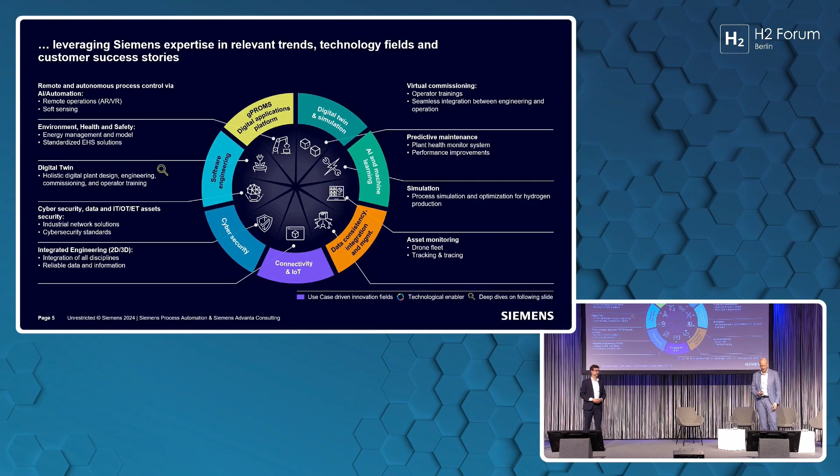So we deliver like a data hub. The data hub meaning we have the platform that gives you all the data available for your plant. That's what we have as software. Enable...

Your workforce basically by simulation training - that's what I was saying. If you have like a simulation of your automation environment, you can train your personnel for the operation.

We have software for the design and engineering, basically as a digital twin, so you can set up the plant from actually 3 different angles. It would be the actual plant you can simulate, but you can also simulate the process, the chemical reactions within the process, what's happening, and that is what would enable you to scale up very quickly.

It's about security, I already mentioned that. It's about integrating the OEM packages, which we call package units - compressors, electrolyzers, water purification, to name some of them - and ensuring that they're integrated into an overall concept from the automation.

We're very, very common within the package unit suppliers, so that makes it easier to set up an entire plant with a platform.

It's about the business management, giving the management of the plant an insight of what's happening, giving them key performance indicators so that they know very quickly what's happening in the plant.

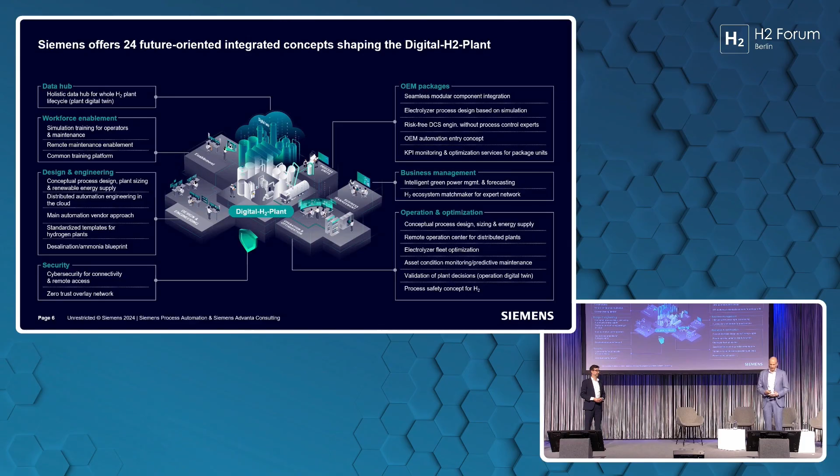And it's also about the operation and the optimization, meaning that you can do, for example, a remote operation of the plant, remote maintenance, which are 2 different things. So that's basically what we do.

To give an outlook of what this could look like in the future, it could go a lot further even. We could even be talking about integrating drones, for example, for further development of the plant, to integrate their pictures into a digital model of the plant.

So you can have a 3D mock-up of the plant - we can do this currently already. Also the drone pictures we can integrate, so you can set up basically for training purposes, but also for service purposes. You can have a 3D model of the entire plant that you can go through with augmented reality. So you give your operator a tablet, and he's capable of taking his order and going through the plant with the 3D mock-up to then do a service job at the equipment that he is guided to, with the entire documentation that is also provided - just as an example.

So it's about data transparency in this case, for example. It's about rapid data-based decision-making, maybe even automized decision-making at the time. It's of course about environment, health and safety - it always has been in the process industry, so that is an old requirement, nothing new really. It's about cybersecurity, becoming more and more crucial.

It's about intelligent and predictive operation of the plant, meaning that you know what might be happening, that you can react in terms of scenarios. It's about flexible and modular design, so that you can basically enhance your operation or build it bigger. And it's about a secure workforce and enablement, meaning that you have the possibility to train your workforce on these tools.

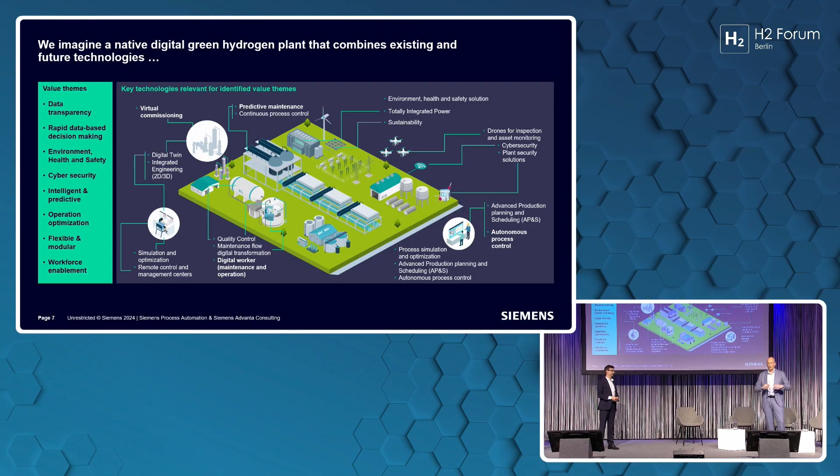There's a lot more to be said. We do measuring equipment, so we also do hardware, not only software, gas analytics, rectifiers, but that is the digital sphere. In the core, there's always the automation, but there's a lot more to it. So mindful of the time, let me just take you home.

I think many things might also start without even having already the groundbreaking and an actual project. So along these first steps, our value proposition also includes advisory services that might just include such questions on where do you get the electricity from, how do you create a positive business case, how do you get FID, how do you even get an investor story put together. So these are some of the more advisory questions that might come before actual technology is of use.

And this advisory is really building on the deep domain knowledge and the tech stack that Peter was just introducing to you. Many colleagues and a strong team, happy to engage with you also further over drinks. And thanks so much. Thanks for your time.

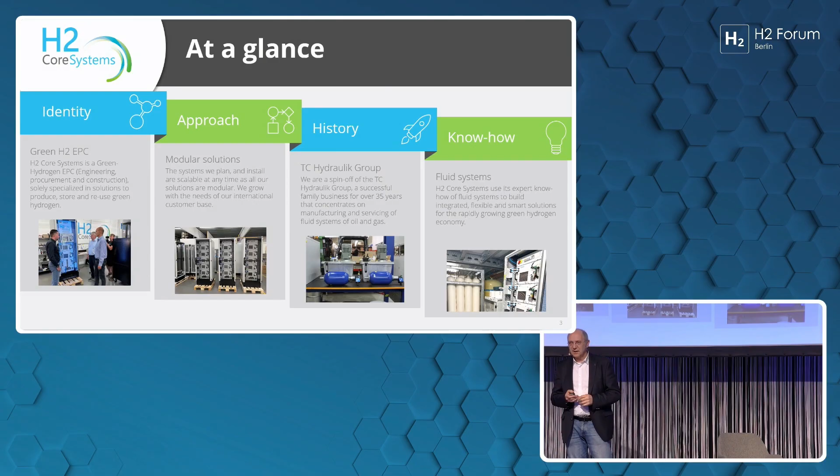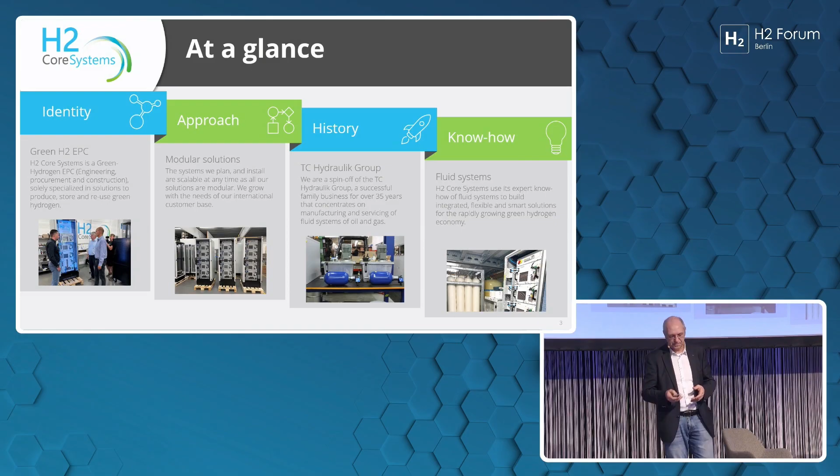What I would like to do, because this is a talk about systems, solutions, and use cases, is show you some of our actual daily work, some actual projects, and all the components of a system. So of course, electrolyzers - we offer electrolyzers between 2.4 kilowatts, if you remember, the smallest system from Enapter, and 1 megawatt, the largest system from Enapter. In between, we have several systems. So we can provide electrolysis systems between 2.4 and 1 megawatt, that means between 1 kilogram a day and 450 kilograms a day.

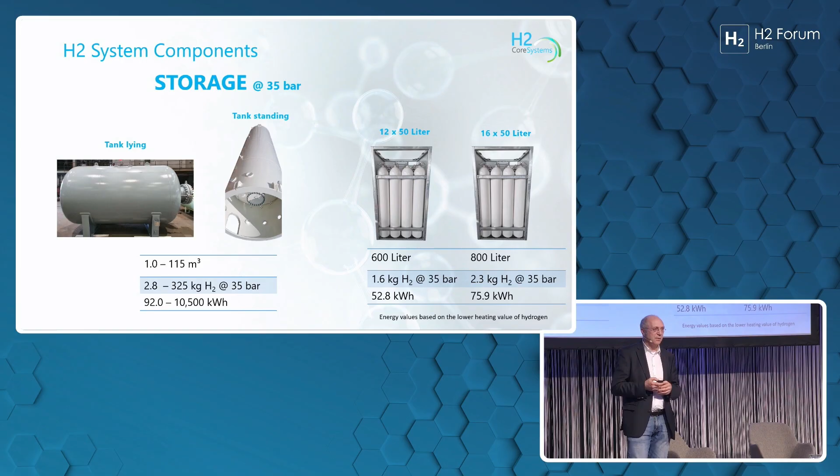So we recommend storing directly at the output pressure of the electrolyzer, 35 bar, in a 35 bar tank or in gas bottles. This is the cheapest and most efficient way to store hydrogen, and companies usually have the space. If you don't have the space, of course, then you need to compress.

But here's first what we can offer. For example, a 1 cubic meter tank holds about 2.8 kilogram, about 92 kilowatt hours of energy. The largest tank we can offer is 115 cubic meters, holding about 325 kilograms. If you remember, the Nexus 1000 makes 450 kilograms a day, so this is one tank.

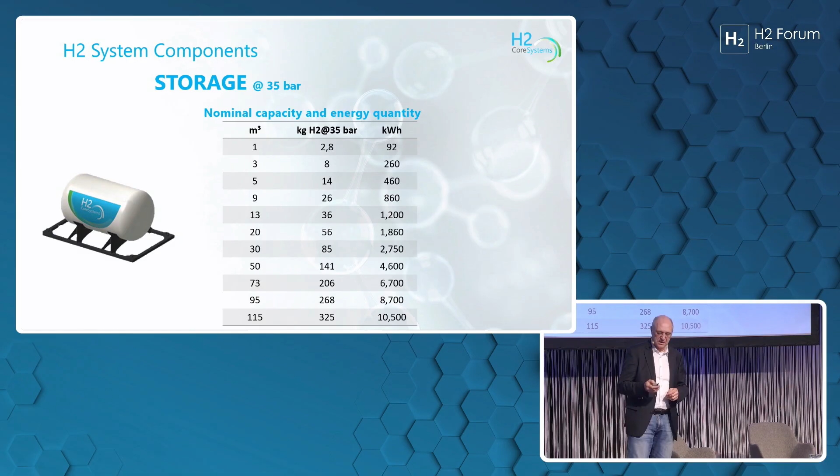That's the bottleneck. So if you don't have the space, you need to use a compressor. Also, if you need high pressure for mobile applications, I'm sure many of my colleagues have already talked about this.

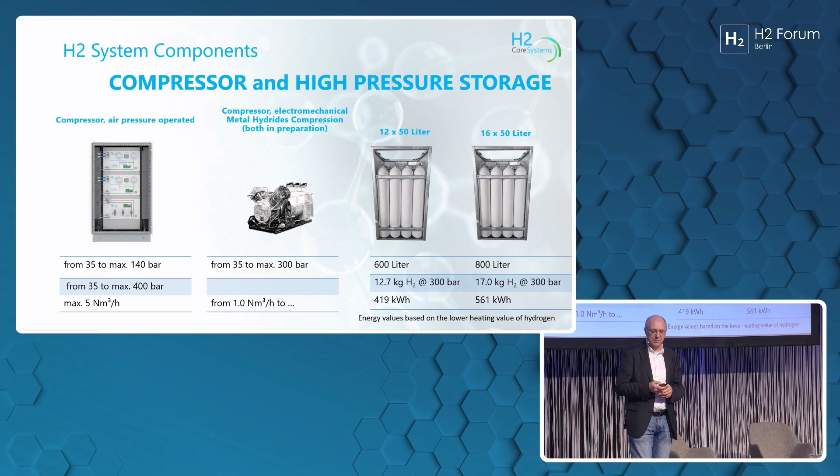Other components in a complete system are the water purification, very important. Here's a small one, but we also work with other companies providing larger systems depending on the size of the system. And a gas dryer, of course, if you need 5.0 hydrogen quality.

A battery is always part of a stationary system. I don't know if everybody's aware of this. If you have a stationary system, you will see in my slides, I'll come back to that, because the fuel cell is nothing else than a battery charger.

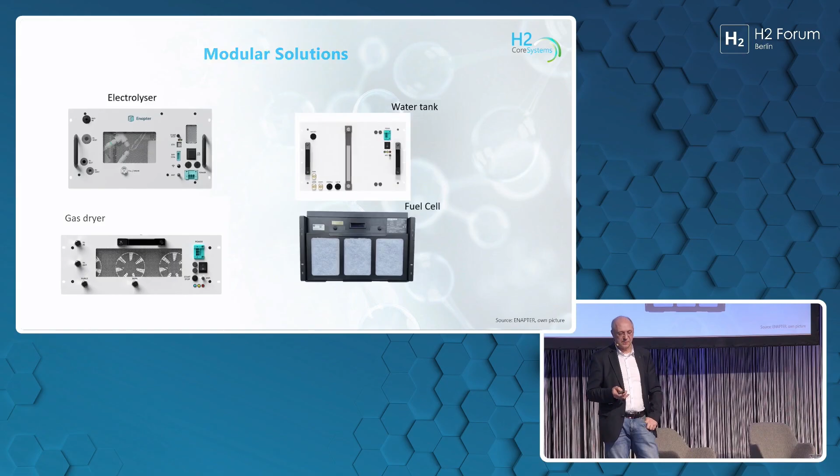So these are the advantages of AEM. These are modular systems, so the customer can choose the system, and can have small or larger systems. So let's switch to the solutions.

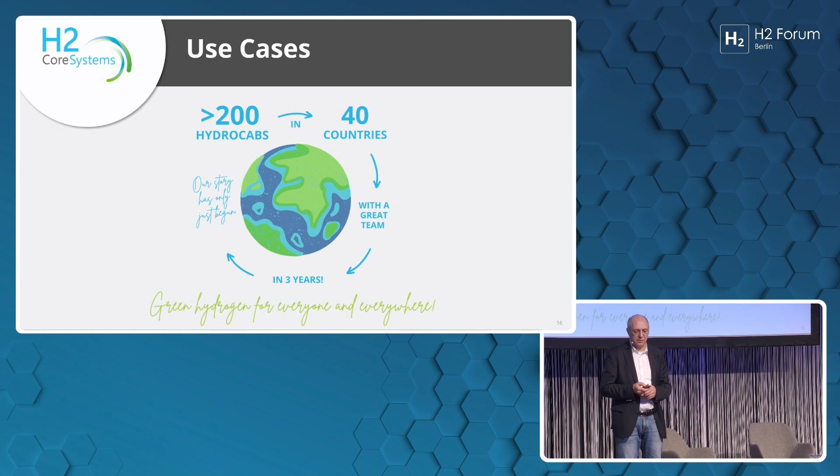We have sold about, I think now it's probably more than 200 cabinets in 40 different countries. Before I start with the use cases, the first market is always the education market - universities, technical schools, learning centers. The first market is also always like backup systems.

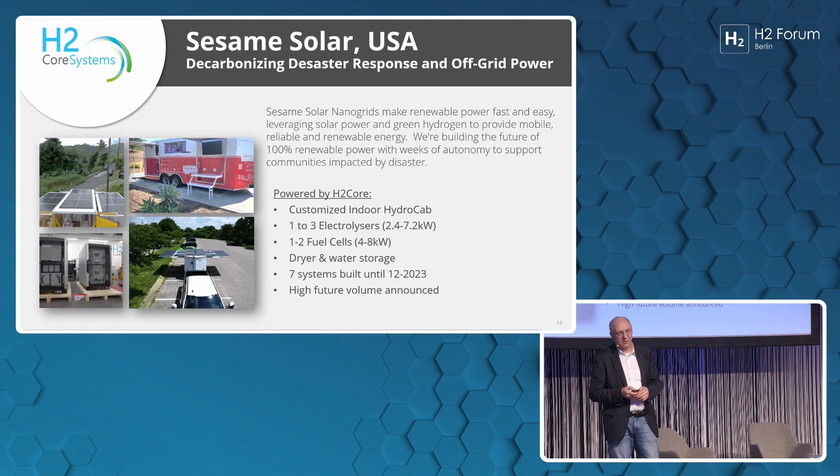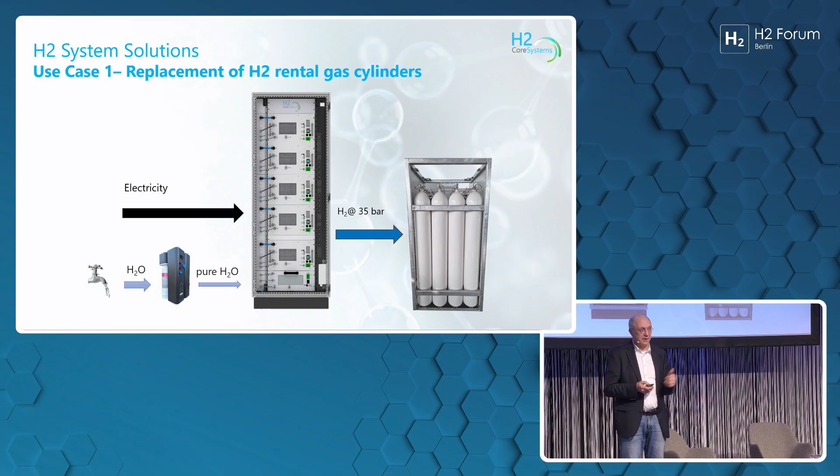Okay, let's start with other use cases. First use case we're working with right now - we have customers who are companies, mostly small and medium-sized companies. They want to replace hydrogen bottles they got from other companies, which they paid for, and want to have their own hydrogen. What they need is an energy source, usually PV, because most companies have their own PV plant on the roof. All they need is water purification, an electrolyzer, and some kind of storage. That's it - then they're able to make their own hydrogen for their own use.

Use case 2, for example, is a fuel cell company or other kinds of companies already working with hydrogen components, and they want to have their own hydrogen for testing.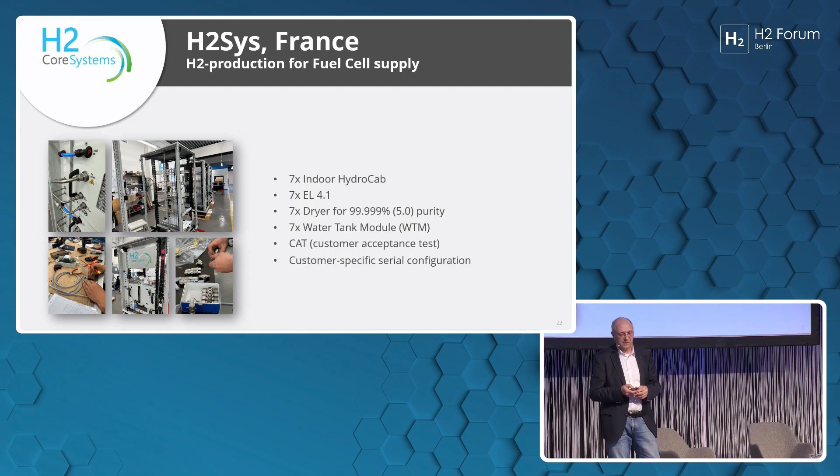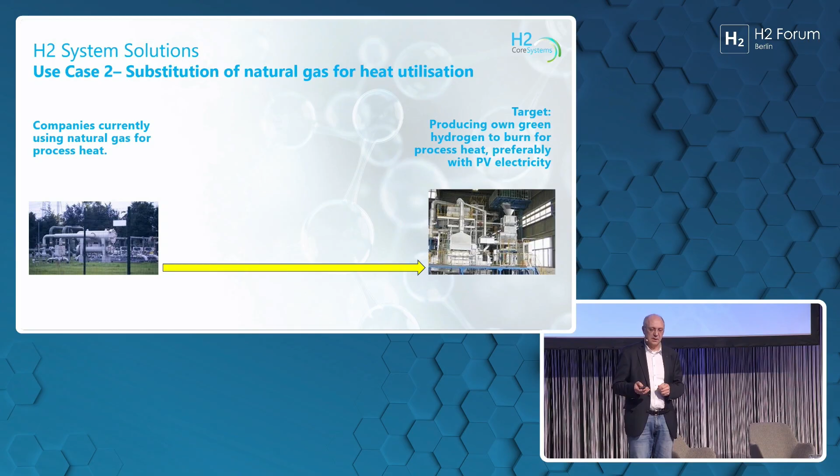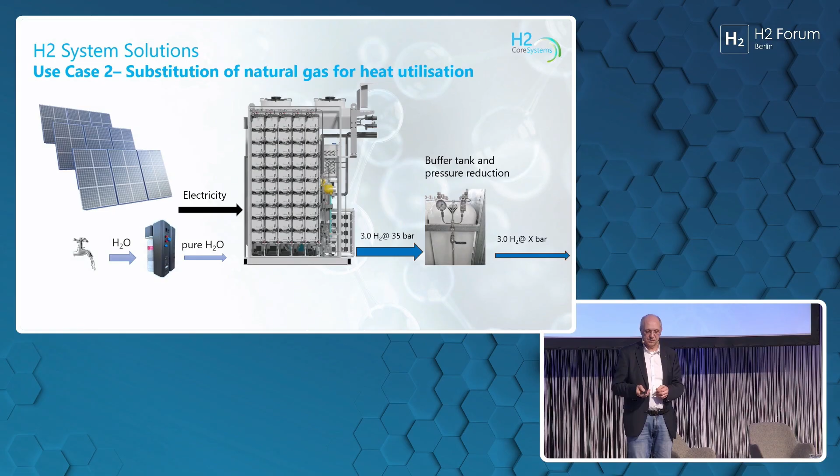Second use case is for heat processes - replacement of natural gas. I mean, we don't have to discuss this, everybody knows the situation in Germany. So there's a small transition from natural gas to hydrogen. Because most companies don't get enough money for PV electricity anymore, they're looking for a business case. They want green hydrogen for their own heat processes. So this is how this whole system looks.

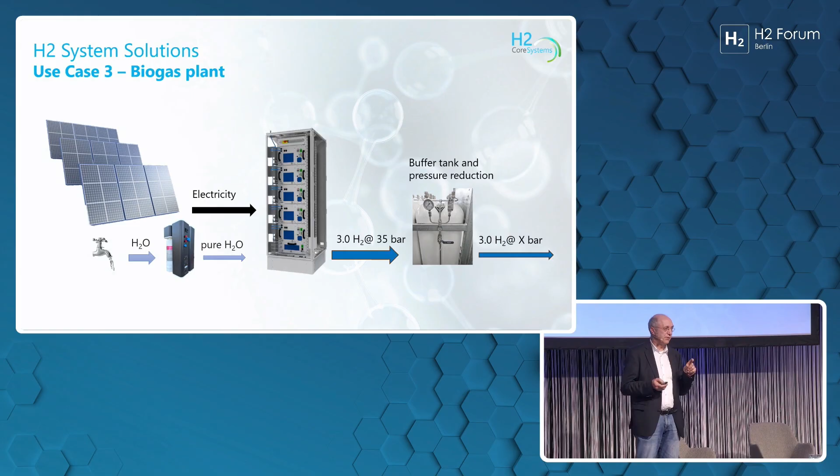Third use case is like a biogas plant. The company is producing biogas, and the goal is - because owners of biogas plants are also usually owners of wind parks or PV plants - they have excess power, and they always want the same thing: to produce their own hydrogen. They need the electrolyzer, water purification, and storage, and then they want to feed at least 20% into the cogeneration plant of the biogas plant, or part of it.

The fourth use case, I think everybody knows this - it's to increase the degree of independency of autarkic systems. Most companies, as I said, have PV systems on the roof, and they want to increase their degree of independency. With PV alone it's usually about 60% if you have a good battery and a well-optimized system, and they want to increase this degree further.

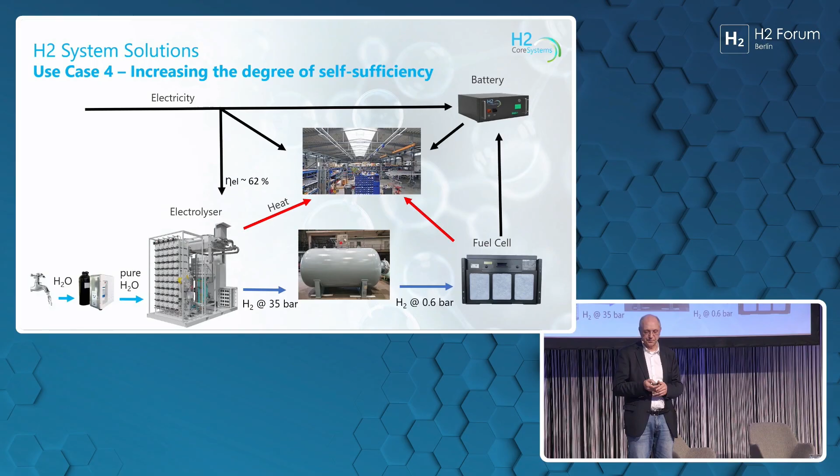This is how it looks. The fuel cell in this system is nothing else than the charger - it charges the battery, the battery provides electricity to the electrical consumer, and the fuel cell charges the battery.

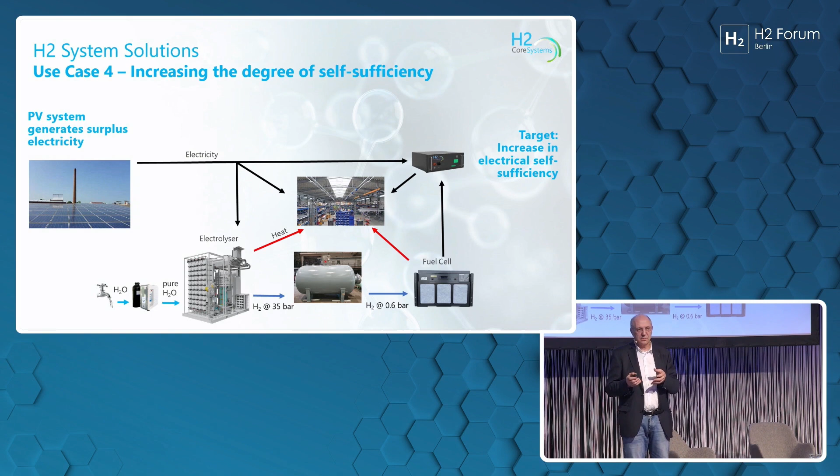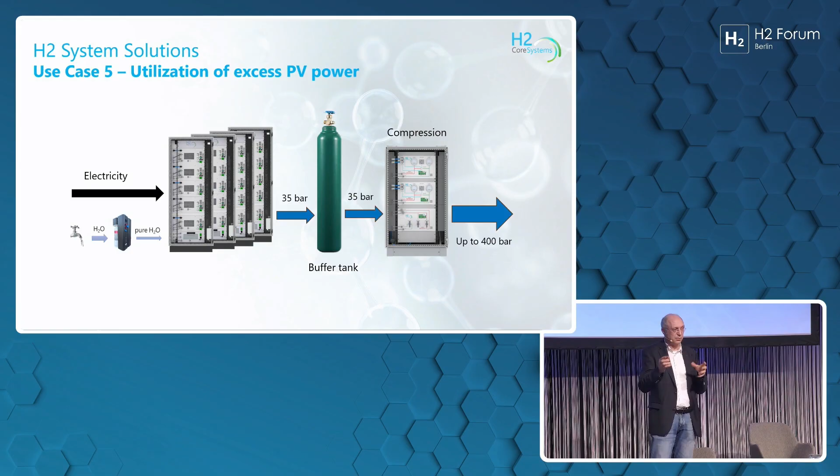This is an example in Poland, use case 5. My 10 minutes are gone, but I have 2 more minutes, so that's enough. Use case 5 is the interesting part, because companies don't need the hydrogen, but they have excess PV power, so they're looking for a new business case. They'd like to produce hydrogen, store it in a trailer, and sell it. So there will be a group in Germany producing hydrogen, and another group that needs hydrogen. Somehow they need to come together — that's the interesting part. How do they come together? This is how it looks like.

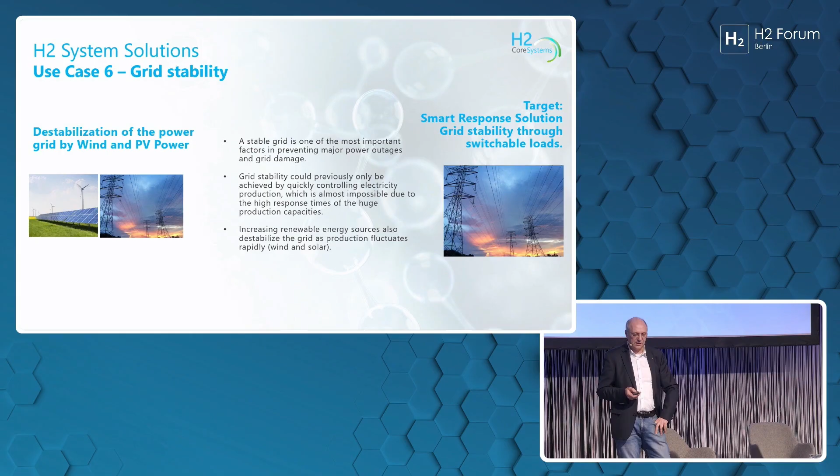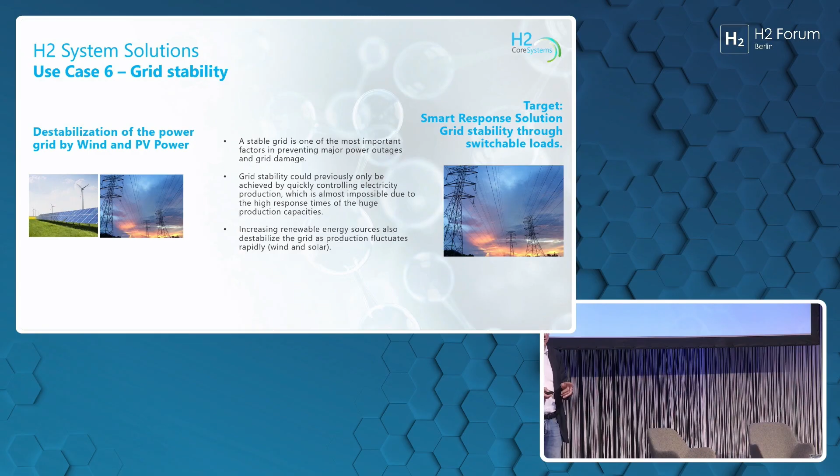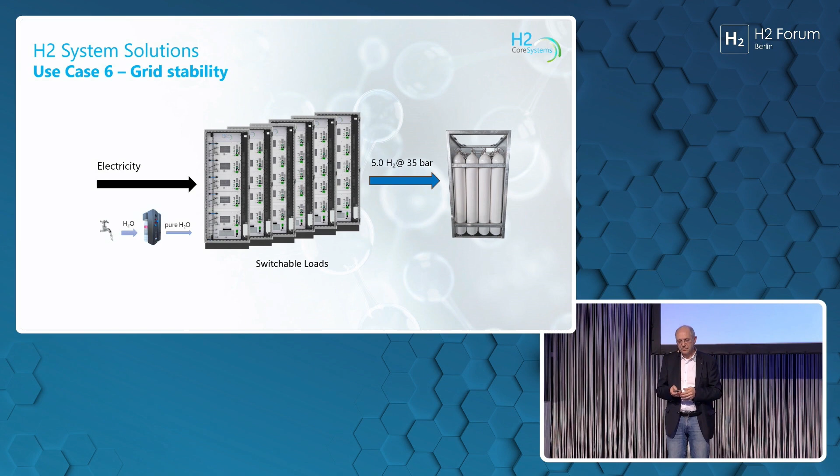The 6th use case is a project we have in the US. In Germany we have an okay grid, so the stability of the grid is not too bad, but there are countries that might have problems. The project in the US uses a bunch of electrolyzer systems. Here we are selling those hydro cabinets as indoor-outdoor systems, and it makes sense to use those cabinets up to 100 kilowatt power consumption, maybe 120. Then we have a next product called Flex 120, and they use this depending on the power — if there's too much electricity or less — as a switchable load and produce hydrogen.

This is the project in the US.

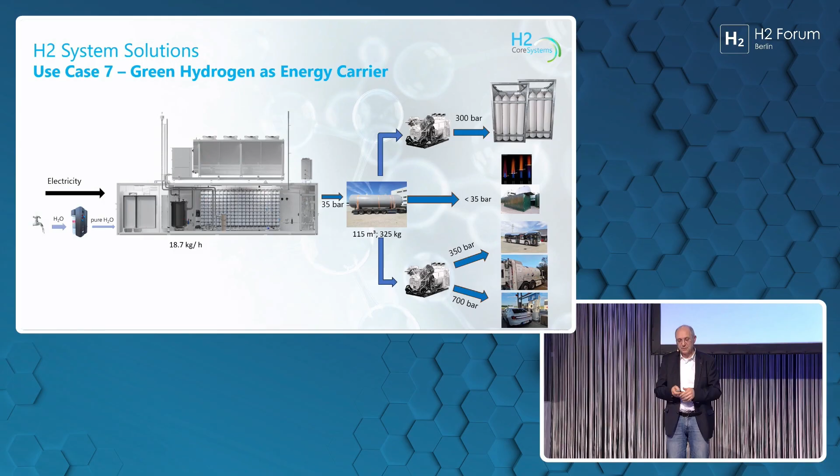The last use case is what I call a green hydrogen energy carrier. It's basically the same question — what can you do with renewable energy? Here you have the largest system of Enapter, and it's a real project. Everything is being used here, or they want to check it out. They produce 450 kilograms a day and store it — it's like a buffer, not a small one, the largest one, but it's a buffer. This is how it looks like, and in reality it's already at the site in Braunschweig, and it's going to be operated pretty soon. Thank you very much.

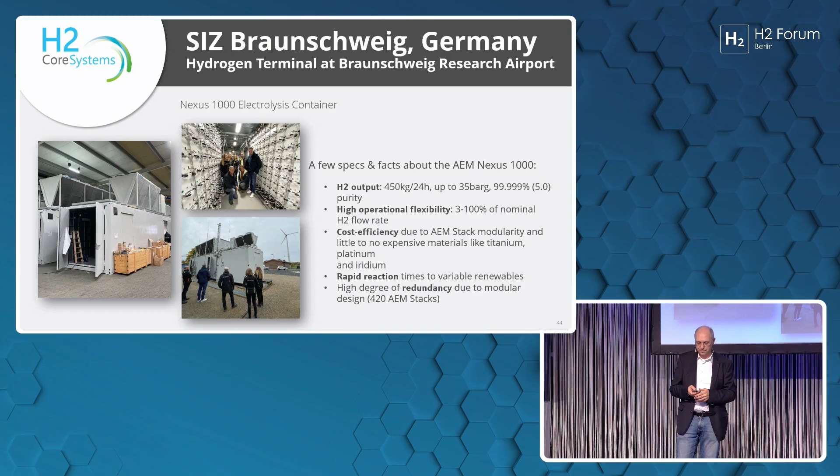Thank you, Uwe, for using the time very efficiently, running us through all of your use cases. Your broad experience became obvious. And there is the question: which one of these use cases would you say has the highest potential for scalability?

For scalability? Well, if we think about industry where our focus is on systems around a megawatt and less — I know that most of my colleagues think big, 100 megawatts, and of course that is industry. Our business partners or customers are small and medium-sized companies, the Deutsche Mittelstand, and almost everybody has a PV system. I think there's a big potential there — so I think all of them.

Yeah, okay, one last question: from your broad experience and all of that, what do you consider to be the biggest challenge now in storage?